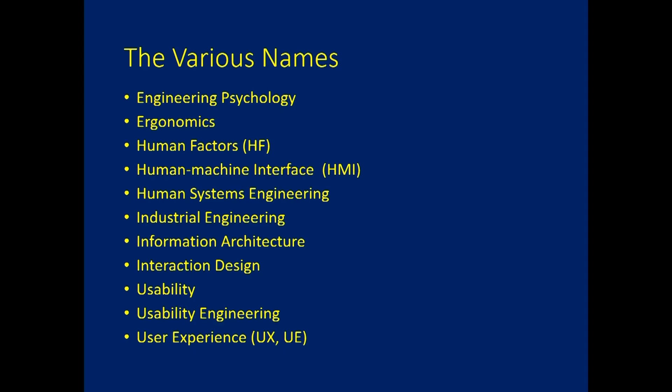So highlighted here are probably the 4 labels that are most well known in the automotive industry: ergonomics, human factors, human-machine interface, or HMI, and user experience, okay? The one at the very bottom, user experience, is probably the most recent label that came out. It came out in 1993 by Professor Donald Norman, and it was done for computer user interfaces and graphical user interfaces. That's kind of where that was born out of.

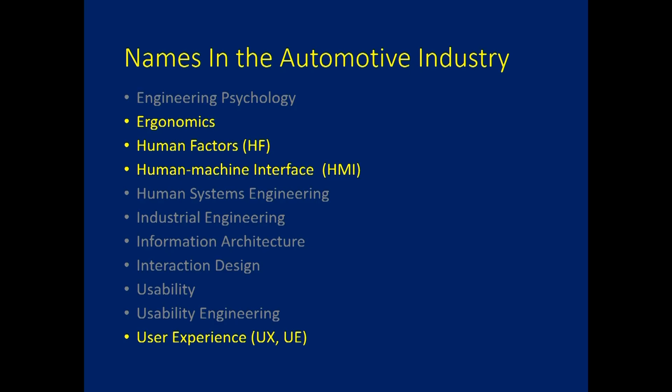The reason you see it used in the auto industry today is because that touch screen in the center of our car, which keeps growing in importance and size, is a GUI, pretty much. And so that's why user experience is the biggest name. But the 3 other highlighted ones are the ones that have traditionally been with the automotive industry. But they all do mean the same thing. Okay, so I hope I confused you and then demystified it.

So the strangest name has probably the greatest meaning: ergonomics, derived from the Greek word ergonomia, which is actually 2 words: ergon, which is translated to work or labor, and nomos, which is translated to natural laws, okay? And my first job, I was an ergonomist. And when people ask me, what do you do? I say, I'm an ergonomist. They just look at me and tilt their head like a dog that doesn't understand. And so it's a weird word, but if you understand the meaning, it's probably the most meaningful.

The bottom line is, whatever we call it, HMI, UX, it has a long and varied history. It's gone by many names and crosses many industries today. It did not back in the 1950s. And through all this time and change, however, its purpose has remained quite focused, with a few deviations, which as I dig into the history, you'll understand.

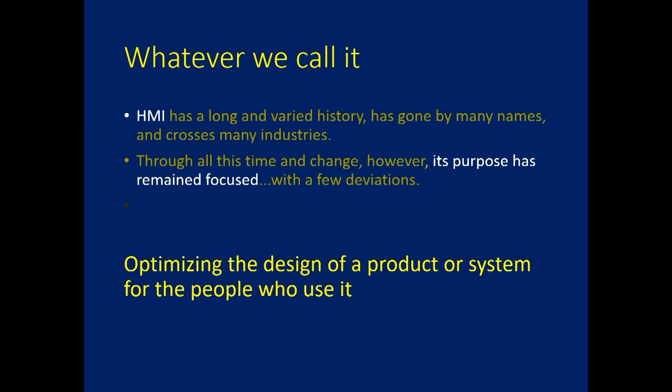But the bottom line is, we're trying to optimize the design of a product or system for the people who use it. And, you know, a lot of people find it frustrating. Some people think, oh, we can do that. But the bottom line is, you have tools at your disposal. And there's methods you can use if you don't have guidelines, okay? So now let's spend a little time talking about the history of user experience.

So I have a quiz question, and the quiz question is, how long ago did user experience, human factors, or HMI become important to the in-cabin design for automobiles? Does anybody have an answer on when this got started? 1910. You know, I did have a picture for a car from 1910. I don't have it in this slide deck, but I'm going to save that and use it. Well, that's a good guess. Any others?

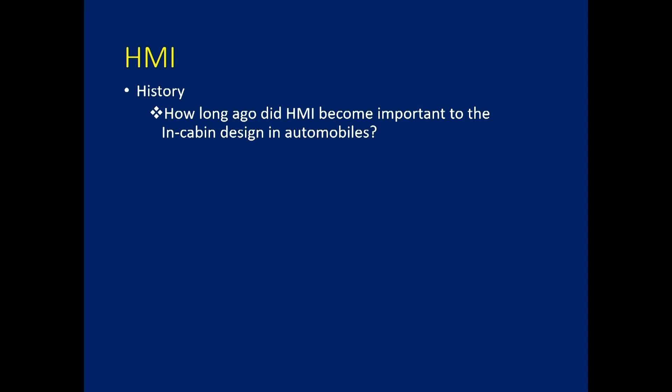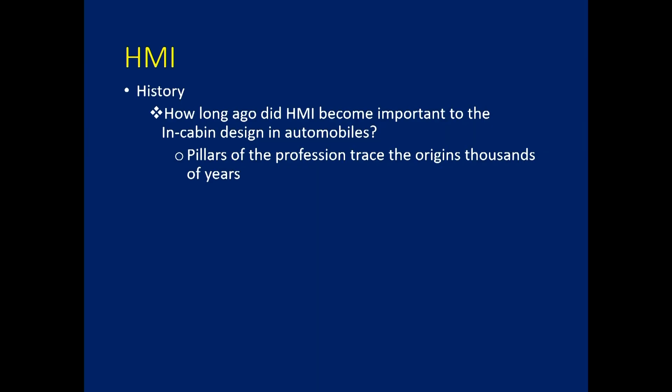Okay. Well, let's do this. Pillars of the profession trace the origins thousands of years. Does that make sense? Does it make sense? Automobiles, thousands of years. I have proof. Okay?

So if you really trace the history, you can go back 4,000 years BC and the ancient Chinese philosophy, which you hear a lot today, of Feng Shui. You typically hear about that for people designing their homes or office spaces, okay? But it also applies to in-cabin design. The best space is one in which the arrangement of objects is aligned with the space's flow of energy, okay? So if you translate that to engineering design terms, it means purposely setting the layout, materials, and colors to ensure a space that's as harmonious, balanced, and functional as possible for the person working in that space.

And you can think, yeah, we want that in our car, we want that in our cabin. If you think about automotive design terms, it's optimizing the arrangement, visibility, access of your displays and controls. That's what's in the cabin, displays and controls, for the driver. So that's 4,000 years BC. I know it's a long time ago, so let's move up to today.

500 years BC. Hippocrates, I'm sure you've at least heard of the Hippocratic Oath, if not Hippocrates, allowed observation and rationality and his own genuine respect for patients in the medical industry to guide his practice. So through this, Hippocrates developed specific design principles for tools and workplaces for surgeons. So he was thinking about this 500 years BC. How do we optimize this workplace so the surgeon can work on a patient and be effective?

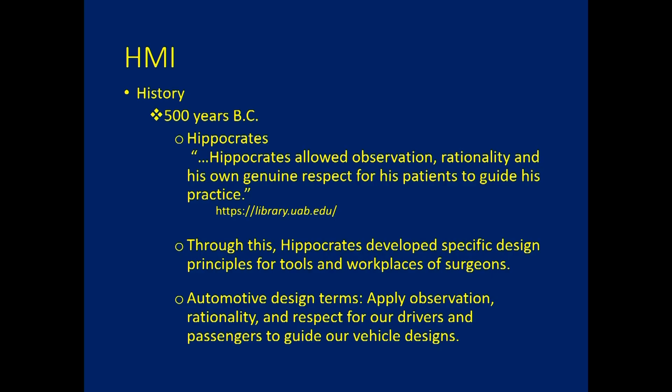Okay, so let's come up to today. I'm sorry, one more piece of history, one critical moment in history, and that's 1943. During World War II, there were a lot of accidents with a number of fighter planes, okay? And specifically what was happening was the planes were landing, and instead of adjusting the flaps after landing, the wheels would get retracted. And what resulted were a lot of accidents and destruction of planes and deaths of pilots. And this went on for years

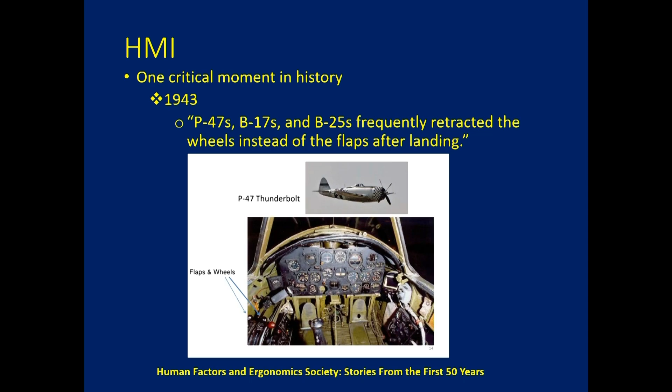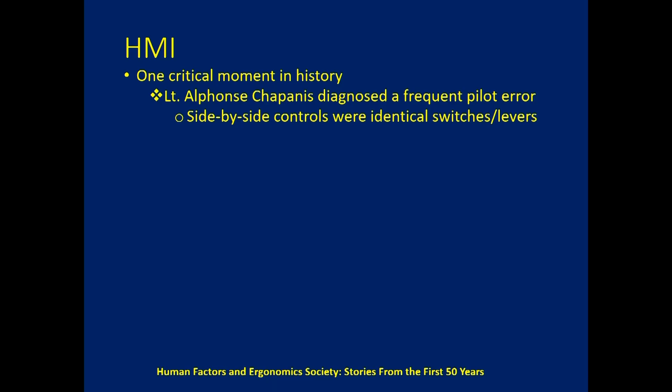until a Lieutenant Alphonse Chapanis, who actually was a psychologist, diagnosed this crashing as a frequent pilot error. And here's what was going on. I know this is a messy picture, but you had two side-by-side controls, those black controls, and they were identical switches and levers. But one was for adjusting the flaps, and one was for retracting the wheels, okay? And you had highly trained pilots making this error.

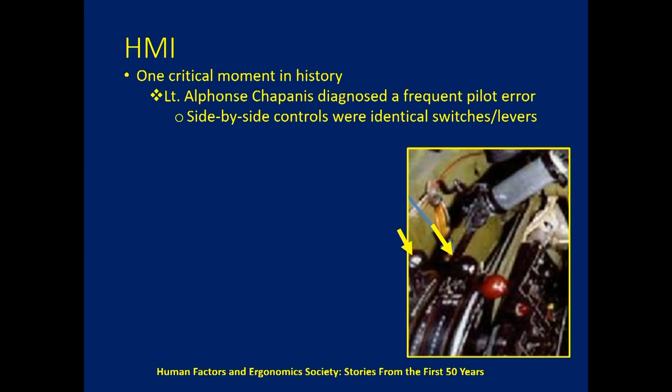So Alphonse came up with a solution. As an immediate wartime fix, a small rubber-tired wheel was attached to the end of the wheel control and a small wedge-shaped end to the flap control on several types of airplanes. So you had something that was visually different, but just as important, it was also tactilely different because those controls were right next to each other. That was the wartime fix.

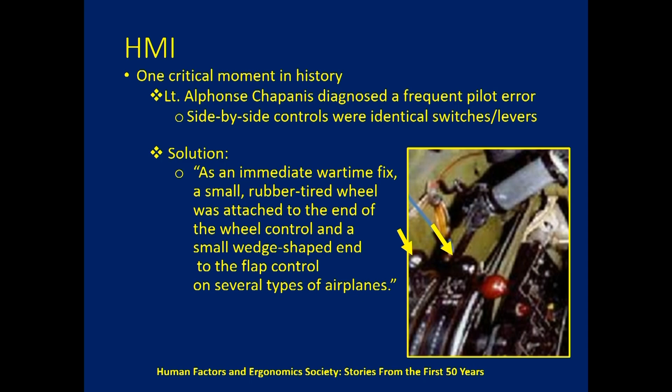And once the war was over, these mnemonically shape-coded wheel and flap controls were standardized worldwide, and they still exist today in the commercial aircraft that you see, as well as the small aircraft. Shape coding is just as important today as it was back then. And it's even something important to consider for automotive design. I know sometimes that goes against the aesthetics and so on, but it's something to at least think about.

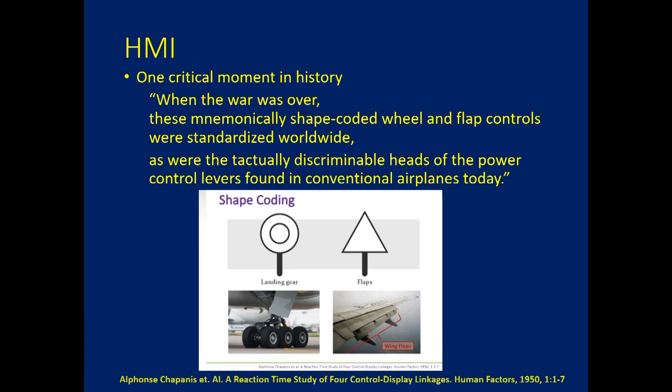So most of the ergonomics, human factors, HMI, UX work was being done for aerospace, okay? And what happened is there was a transition after the 50s to the consumer market. And this has only grown since 1960. In 1960, the first non-military applied human factors group was started in the US at a company called Eastman Kodak, a photographic company where they made cameras, film, and so on.

And coming to the consumer market and out of the military, of course, a lot of the focus was on workplace optimization for safety and productivity. You had a lot of areas where they were assembling cameras, film processing, paper, and all the things that went out along with photographic equipment. And you also had specialized people working on the equipment design for the production environments, okay?

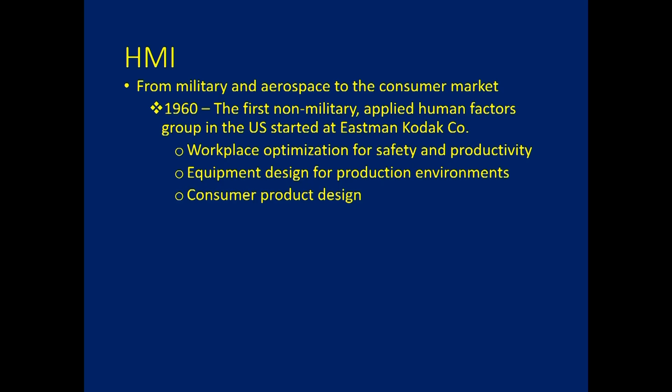But the other thing that got started in the 60s was consumer products design, because Kodak, from its inception, had a professional film market where trained professionals would use the cameras, but they also realized there was money to be made in the consumer market. So they did all kinds of things to make picture taking by consumers affordable and understandable. Okay, and a lot of innovations happened in the 1970s, 1980s, 1990s. I joined Kodak in 1986, 26 years after they got started, and I worked almost exclusively on consumer products for 12 years.

So coming up to today, this profession, which in 1960 left aerospace or expanded into consumer products, is now across almost every industry, from medical, consumer, Internet of Things, automotive. And it focuses on optimizing the design of products and system interfaces for the people who use them. So if you want to know what's important, it depends on what the product is and what the user is. For some things, like websites and some consumer products, it's just being able to pick up and use the product without training.

Okay? When it comes to automobiles, in North America, the average American gets their driver's training between age 15 and 18. That's it. So as the decades go on and we're throwing all this new technology to assist or delight the drivers, how do they learn this stuff?

It can be overwhelming, or worse, they may not know the product's feature is there, and they may not use it because they don't understand it. The first time I drove a Hyundai car when I started working for them in 2014, the newest car I had was 12 years old.

So I'm driving down the road, I set the cruise control, and I'm driving down the highway, and all of a sudden, my car is slowing down. So I thought the cruise control was failing. But that's because I didn't understand what adaptive cruise control was. To me, in my mind, cruise control worked a certain way. That's our biggest challenge today.

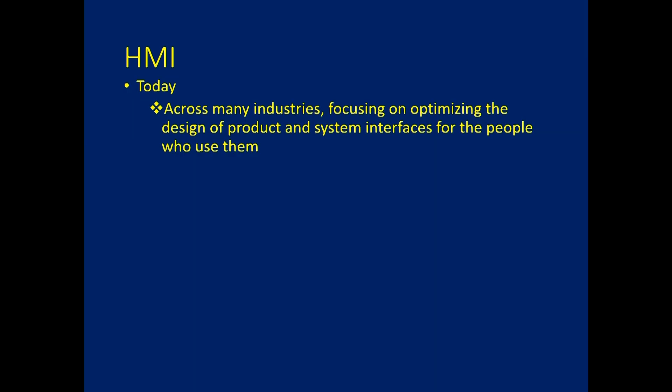So in the automotive industry, when you talk about our profession applied, it's usually focusing on the infotainment system, which I did for many of my years, but it's also the controls and displays. Any controls and displays in the car, as well as anything you consider a touch point, okay? So it can be inside or outside of the car. And the classic term ergonomics is applied to a lot of things that are physical for reach, vision, and so on, and some things are just for cognition and understanding.

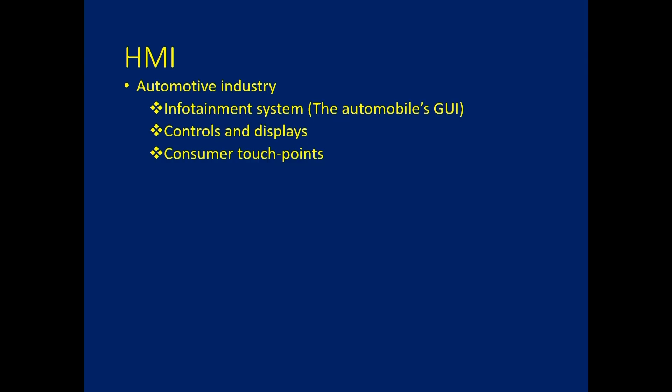So the way we tackle it is three things I talked about early on. One was understanding human capabilities, which we have a lot of information on. Another thing is the standards that are available to us, some that we have to follow, some that are more guidelines. And then the third thing we have in our toolkit is user research. And that can be focus groups, that can be surveys, but more importantly, it's usually product testing with the target audience, okay? And there's two ways of doing that.

One is called contextual interviews, which is working one-on-one and working in context, in the car, in the simulator, or in a consumer's current vehicle to understand what else they need. And then the other thing we do is usability testing. And we do it with existing products, with competitive products, with prototypes and engineering models, or even with product concepts.